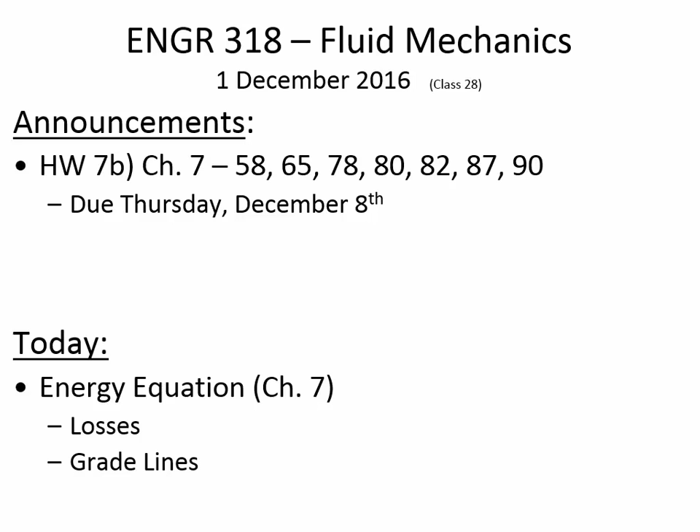The exam is going to be cumulative because it has to be. It would be impossible to give a non-cumulative exam in this class because all of the concepts build on each other. But a disproportionate share of the questions will come from the material since exam 2.

All right, well, let's begin by talking about pipe roughness. Here's a table you haven't seen before. It illustrates what's called the equivalent roughness of different materials — some materials that over time pipes have been made out of. Some of the more common pipe materials these days are galvanized iron, cast iron.

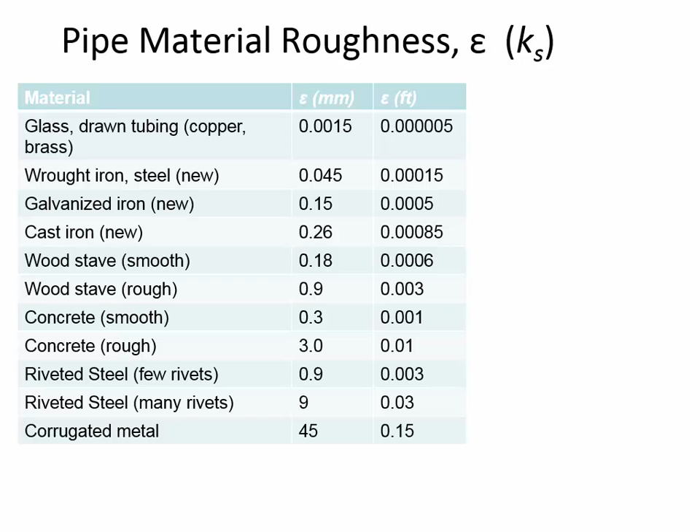Occasionally concrete pipe is used for gravity flow, meaning like sewers and storm sewers. It's pretty uncommon to have concrete piping for pressurized flow. It's kind of strange to think that long ago people used wood for piping, but they did.

I'll dim the lights so you can see the image there. That's a picture of some wood pipe that was held together with a coil of wire, and it's a little bit like a barrel. You need really excellent craftsmen to make a watertight pipe, and it's probably going to have lots of leaks. But what we're really focusing on here is the equivalent roughness.

You'll notice the measurements here are in millimeters or in feet, and what it measures is the average diameter if you were going to represent the roughness of the pipe as an equivalent piece of sand, which is a little bit abstract. But let's say, for instance, that we had smooth concrete.

Most people have felt smooth concrete — you have a visceral experience of running your fingers over it. So what we're saying is if we were going to represent the roughness of that surface by gluing pieces of sand on that surface, the equivalent diameter of those pieces of sand would need to be 0.3 millimeters. If you think about the size of a millimeter, I think you'll agree that makes sense, comparing the size of a millimeter to your finger going over it.

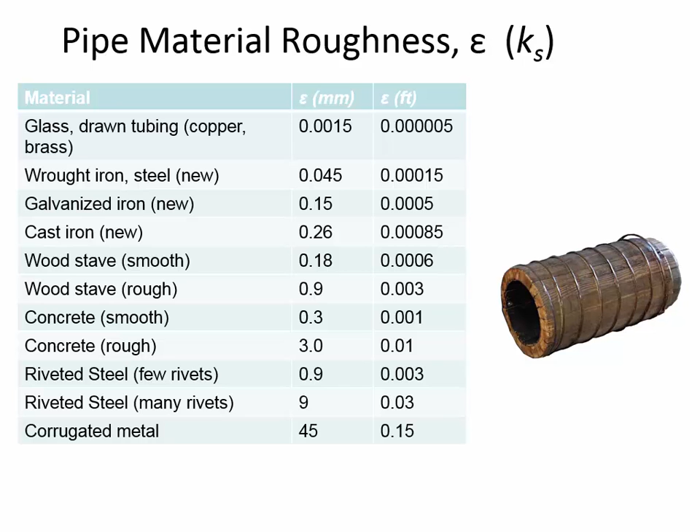You start off with an understanding of what the pipe is made out of. So if we had, for instance, a pipe made out of cast iron, then our K sub s for cast iron is 0.26 millimeters. And on this figure, we're going to say what's the diameter of the pipe we're working with. One common pipe diameter could be 0.250 meters, which is 250 millimeters.

All right, I think most of you have calculators. Can you tell me what would be the K sub s to D for this pipe material and this pipe diameter? Should be pretty close to 1,000 -- wait, 1 over 1,000, right? So is it 0.001 roughly?

Yeah? All right, so what you do is you start off here on the right axis with the relative roughness, and you find the curve that you're closest to. Or if you're in between values, like if you had 0.0008, then you'd be between these two lines, equidistant between them. So let's say in our case we're following this 0.001, and then on the bottom axis you can see it's saying Reynolds number.

Anyone? It's been a while, but do you remember what is the formula for Reynolds number? There's not a square root. I appreciate you taking a guess. Diameter is in there, yep.

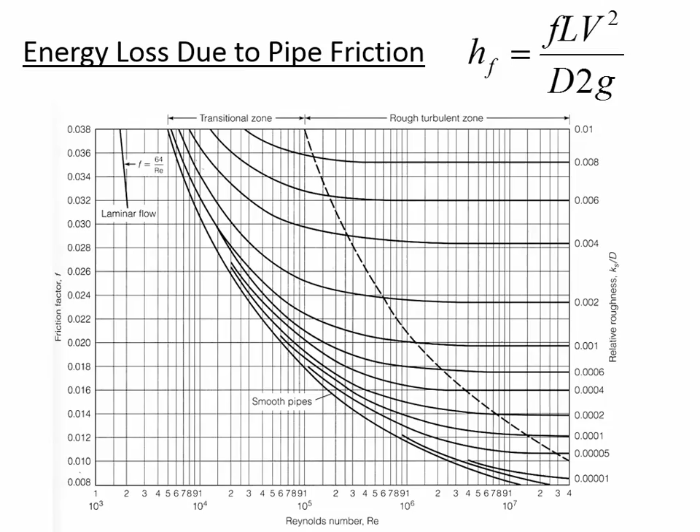Let's talk about local losses now. The Moody diagram applies to pipe friction, which is a distributed loss, meaning it acts over the entire length of the pipe. Sometimes we calculate how much energy loss there is per meter or per 100 meters of pipe. But the point is that it's spread out, occurring over the entire circumference of the pipe and the area of the circumference multiplied by the length. So it's a distributed loss.

These local losses are sometimes called minor losses, but that's kind of a put down—it's pejorative in a way, because they're important. In fact, if you've got a lot of fittings in a system, they can account for a considerable amount of head loss. So I try not to call them minor losses; I try to call them local losses.

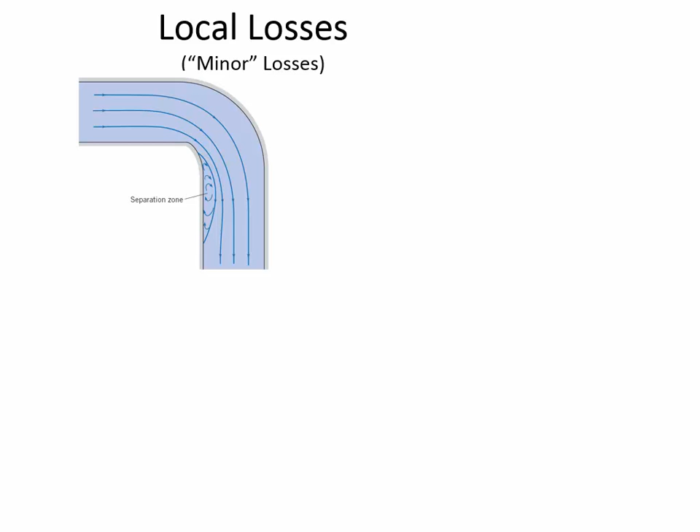They're caused when flow goes around an obstacle that induces turbulence. You can see here a separation zone where the streamlines try to reestablish an ordered pattern, and as they transition, there's a circulation, like an eddy, where the flow is hung up. The effective flow area is more narrow than it would be because this section of the pipe isn't carrying flow—it's just got this circular movement. So there's an energy loss from the circular movement, and the flow is also choked down through a smaller effective diameter, causing more energy loss.

So we can measure a local loss in the lab, and you will measure one next week. You've already done the distributed loss with the pressure gauge and taps a meter apart. Next week we're going to plug into a couple of different fittings and measure the delta P between the upstream and downstream tap of a fitting, then consider the velocity of flow through that fitting and the density of the water.

With that, you can calculate the K value, which is a linear expression of how much energy is lost at a certain spot—the higher the K value, the more energy you lose. When you have a flow path, say from a reservoir to your house, you count up all the locations where water flows through a valve, goes around a bend, or encounters a change in pipe diameter. Every one of those disturbances reduces pressure. So you add up all the K values, like an accounting exercise, and then multiply by the velocity head.

One word of caution: if you have lots of different pipe diameters, you're going to have a lot of different flow velocities. So you should only multiply the K values by the velocity that is applicable at the fitting in question.

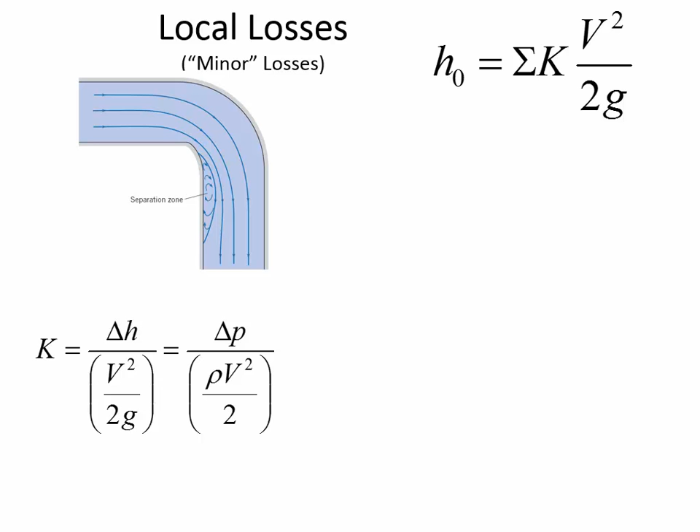If you brought your binoculars, you can see this table, and we've got different types of local losses. So here is a pipe expansion, and it's kind of interesting to note that they're even keeping track of the angle that defines how gradual the transition is.

Let's compare two different angles - the first is a 20-degree angle, the other is 180. 180 means an abrupt transition, meaning it's a small pipe immediately going to a large pipe, instead of what's pictured here, which would maybe be a 20-degree angle. So tell me, why does it make sense that the K value would be higher generally for the 180 degree instead of lower for the 20 degree?

Exactly. So anything we can do to make the transition more gradual and to help order the flow will reduce the amount of energy loss. 180 degrees is a very abrupt transition, so the K values are higher.

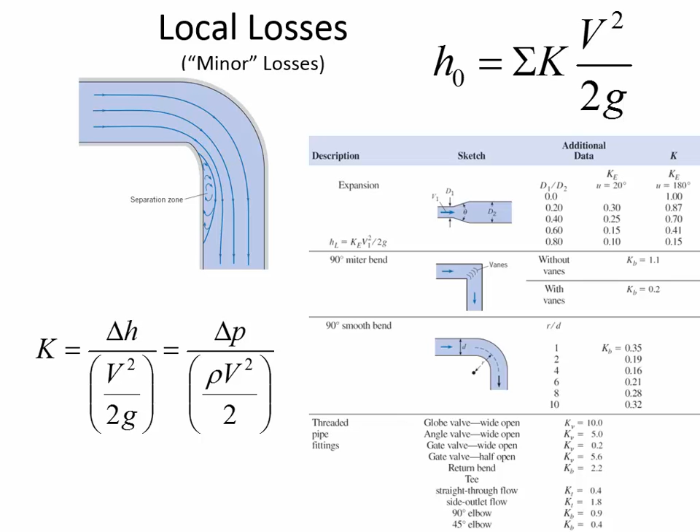All right, here is an expansion. One way to estimate the head loss in an expansion is just by the difference in velocities, so V1 minus V2, the difference in velocity squared, divided by 2g. We'll test that out in the lab as well, because in the pipe rack we've got a couple of pipes with a different diameter upstream and downstream, so we can see the effect of energy loss in the expansion.

If you have water going into a reservoir, then you lose all of the velocity head. This is an interesting thing we have to be aware of when we do energy grade line diagrams. Back to our drawing of a reservoir: think about the water moving through this pipe. Energy can be in 3 locations. Do you remember, I've said this before, where are the 3 locations that energy can be?

Not quite. I'm talking about something more abstract, not a physical location. When we write the energy equation, what are the three terms we usually start off with, before we talk about the turbine, the pump, or the head loss? What are the other three terms that were there when it was just Bernoulli's equation?

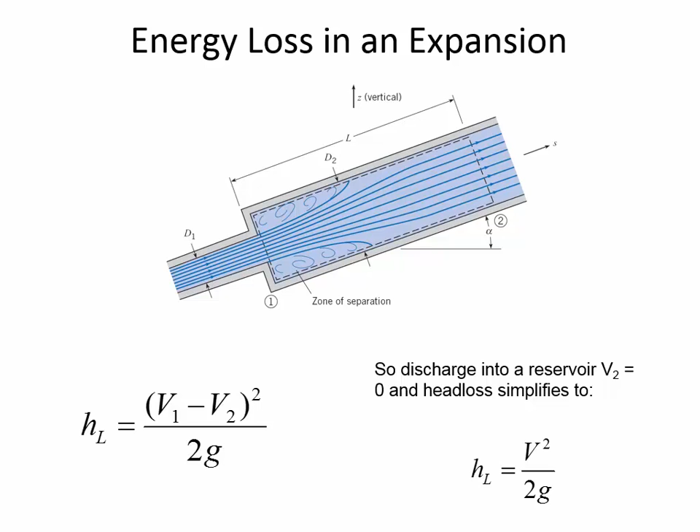You're going to have a question on the exam that uses grade lines. And I love these questions because they're so easy to grade. And, you know, that's important—my comfort and enjoyment is paramount when I'm writing the exams, right? No, not really. But these are easy to grade and they're actually easy to solve too, so I think you're going to like these problems as much as I do.

What this is, is a visual representation of where the energy is and how much energy there is. We're looking at a tank of water, with a pipe coming out of the tank, and at the end of the pipe there is a jet of water. The water is just flowing out with some continuing speed—it hasn't yet started to fall downward, but it does.

At the top of the tank is the energy grade line and the hydraulic grade line, at the water surface. EGL is the abbreviation for energy grade line, and it consists of the sum of three terms: pressure head, elevation head, and velocity head. By contrast, the hydraulic grade line, HGL, is only the pressure head and the elevation head. The velocity head is excluded from HGL.

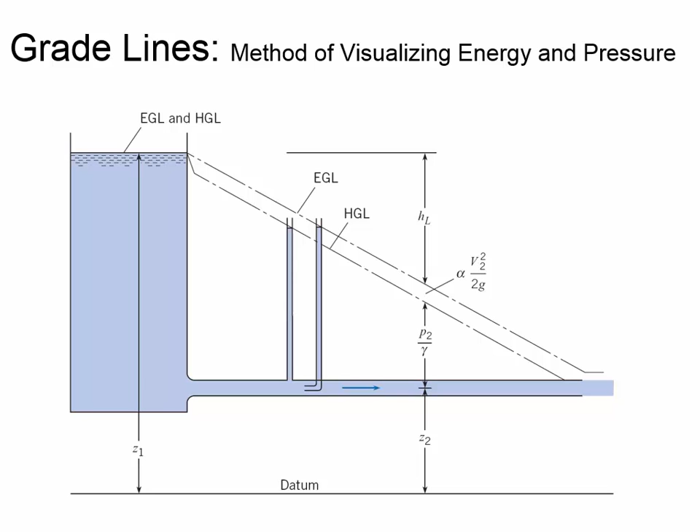Here's a pump. Look what a pump does to the EGL and the HGL. It's a straight vertical line, not a crooked line. It just instantly adds pressure - that's what a pump does. A pump does not add velocity, not directly. By adding additional pressure, that may speed up the flow of water compared to what was happening before the pump was operating. But it's not like when you've got a 4-inch pipe coming in and a 4-inch pipe going out - you can't have faster water in the outflow than you had in the inflow.

That would violate continuity, so the velocities have to be the same if the diameters are the same. So this pump isn't adding energy as velocity, and it looks like maybe the outflow pipe is a little bit higher in elevation.

Remember, the only three places energy can be are velocity, elevation, or pressure. So what this is actually doing is having an instantaneous increase in pressure from one side of the impeller to the other. And since the pressure head term is in both EGL and HGL, there's this vertical line.

And then the line is sloping downward again. And remind me, what does the slope of this line indicate? Friction losses. And the slope before the pump and after the pump is the same, because it's presumably the same pipe material and the same diameter, so these slopes are equal.

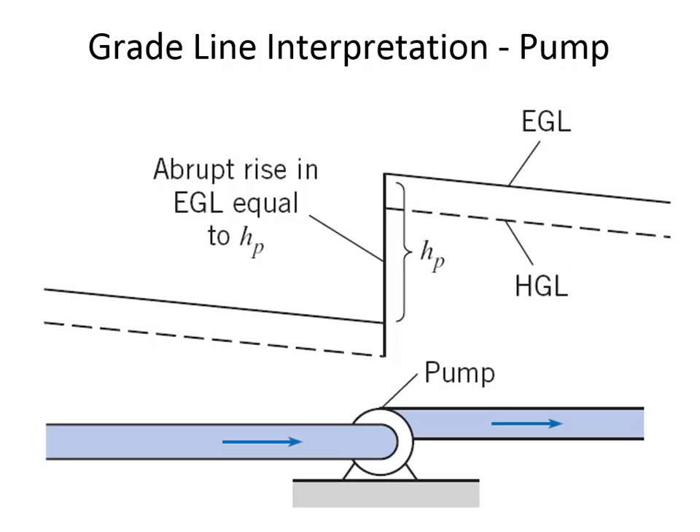EGL is always above HGL. So that's how you draw a pump, if you ever face a situation where you need to draw what happens to these with a pump. Maybe you'll face such a situation.

Here is a turbine, and in this turbine you can see it does the opposite of a pump. With a pump, the line was going up; now here the line is going down. Flow in this diagram is from the left towards the right, so head is given up to the turbine. That means there's a big reduction in the amount of energy that's available.

Now the EGL and the HGL are both at the tank surface to begin with. Then there's this point at which energy is being exchanged because the water is speeding up, so some of the energy has to go into the acceleration, and the EGL and HGL diverge during this entrance. That's what this little line is showing. It's sloped downward because there are friction losses, and you lose a lot instantly.

Now this is a bit odd. You'll notice that here the HGL is actually going up. Anyone want to speculate why there's an upward slope to that HGL? Elevation? No, it's not related to elevation.

Look at the pipe. What's happening to the velocity of the flow here? The velocity is decreasing because the diameter is getting bigger, so the velocity is slowing down. So if the velocity is getting lower, what is happening to the pressure? The pressure is going higher.

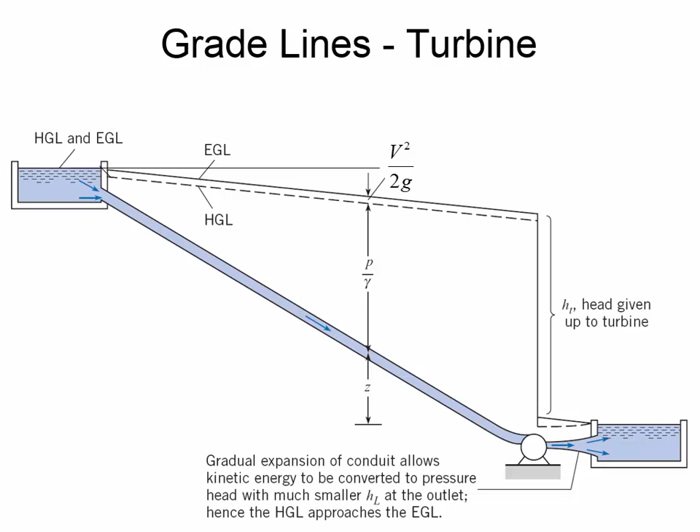Now, whoever made this figure, I think, was a little bit sloppy, because the EGL should be above the tank, and then there's an instant loss of energy, because we've already talked about how you lose the velocity head as soon as the water comes into a reservoir. So I guess maybe the diameter is so big by the time it gets to the reservoir that the energy loss is minor, but I do like to point that out.

Okay, a similar effect here. We have a nozzle, meaning that if the velocity is increasing, then there's going to be more energy loss. So see how the HGL is getting smaller because pressure is being exchanged for additional velocity in this section.

So you're losing HGL. One other thing to point out is that the slope of the EGL is getting steeper. You notice how it's relatively flat here, and then it gets a little bit steeper? So why is that? Why did the slope get a little bit steeper in that section?

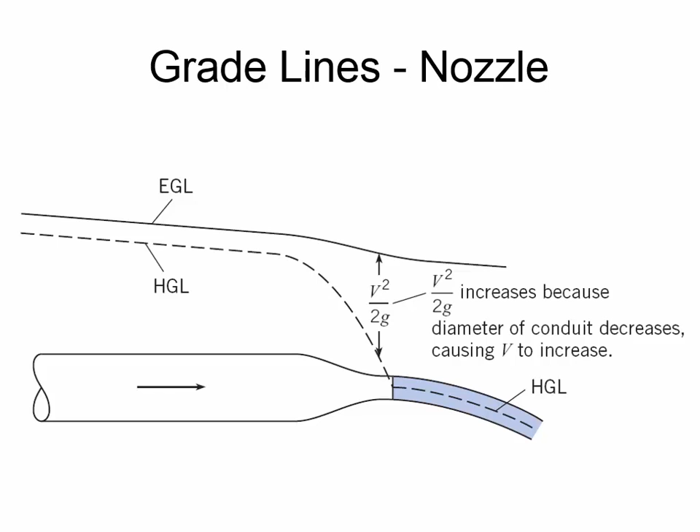Maybe it's partly local losses and partly friction, because it does happen at kind of an isolated location, but the frictional losses are going to become more extreme as well, because anytime you've got a higher velocity, the friction losses are greater. And I think that's illustrated on this next figure.

Look at the two different slopes of the EGL, back when the pipe was big diameter on the left compared to when the pipe is small diameter on the right. So for the small diameter pipe, the things you'd need to include in the drawing: you'd need the slope to be steeper for the small pipe, and you'd need the gap to be further apart.

Why is that? Why is the gap of these two lines further apart for the fast-moving flow? The velocity increases, right, and this gap is related to the velocity head. So that's an important characteristic.

Now we finally see someone who knew how to properly represent the head loss at the outlet. You've got this EGL that instantly was above the water surface, and then suddenly all that energy is gone. Here the little blue lines in the tank show the inflow diffusing into the tank, and all the energy that existed as velocity head is just lost. This is the EGL representation of that loss, as the line was above, now is below.

The other thing I want to point out is that the HGL should terminate at the water surface. Think about where the energy is in the HGL - it's talking about elevation head and pressure head. Inside the pipe compared to just outside, there isn't much change in elevation, and the pressure is going to be about the same, with maybe a little pressure change due to pipe friction over that minuscule distance. That's why you should always have the HGL terminate at the liquid surface, and the EGL should always be above it when it's coming into an open tank like that.

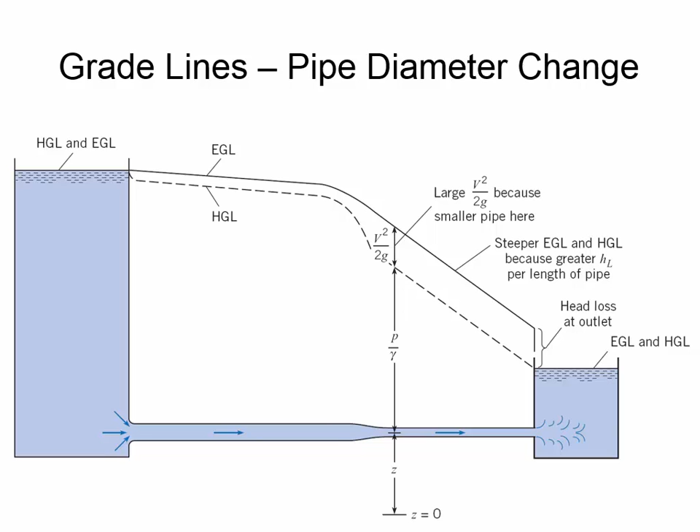Any questions? All right.

It's interesting to point out that the EGL and HGL are independent of the physical location of the pipe. It doesn't matter if the pipe is going side to side, up or down - the EGL and HGL just have this continual downward march related to energy loss due to pipe friction. The pressure in the pipe will be changing, but there can be an exchange between elevation and pressure that the EGL and HGL won't see, since that's occurring inside the pipe.

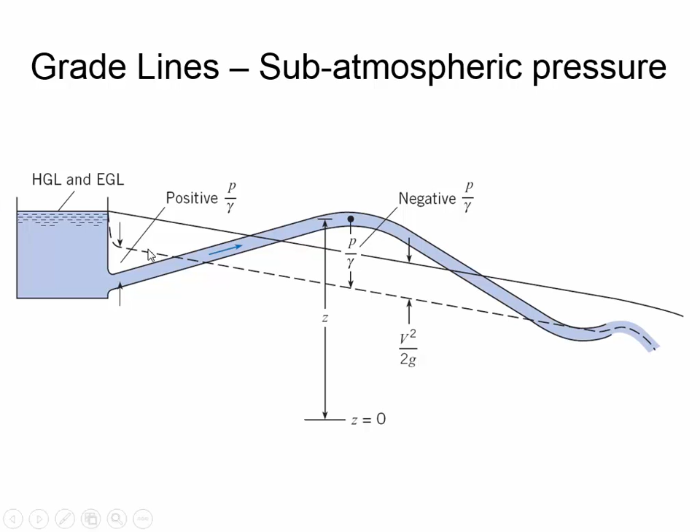So think about this high point in the pipe - you'll actually have negative gauge pressure there. Because if the physical location of the pipe is above the HGL, that means you've got a lot of elevation head, but not very much pressure head - in fact, the pressure head's negative. So if you cut a hole in the pipe here, it would actually start sucking air in rather than water squirting out, anywhere the pipe is above the HGL.

So again, here are the key things you need to include in the drawing: the EGL and HGL at the water surface, this transition where the EGL and HGL begin to diverge. The slope of the line depends on the pipe diameter, because the pipe diameter affects the velocity, and the velocity affects the rate of energy loss. Make sure you have the line above the water surface if there's a jet out like that.

All right, so I want to show you - go ahead. Is there any difference when you have a problem like this open to the atmosphere versus a closed space?

That's a great question. Let's say we had an enclosed tank on the left - yes, there would be a difference, because the water surface wouldn't indicate where the HGL is. If there was a cap on it and they pressurized it, the HGL would be above the water surface, and so would the EGL, since the EGL also includes the pressure head. Do we have to worry about that as well? I want you to worry as much as possible, so yes, worry about that. I won't give you any problems related to it, but I do want you to worry about it.

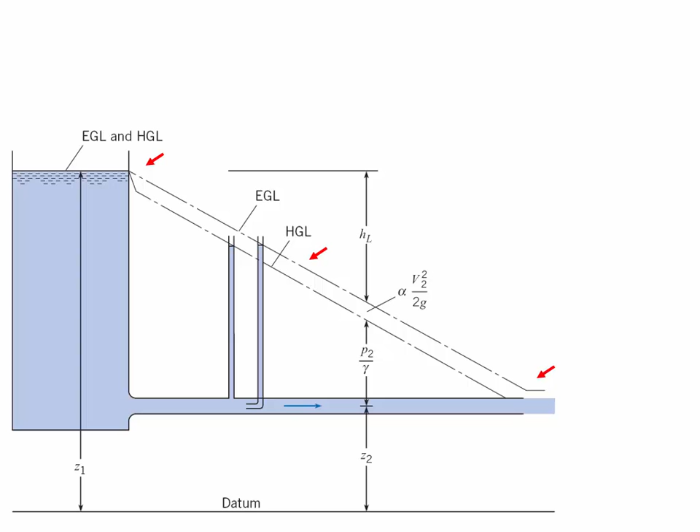Here's what I'd like you to do. I have a drawing here that shows a reservoir on the left and a reservoir on the right. I'd like you to try drawing the EGL and the HGL, so I hope you have some sort of a straight edge - a credit card will work fine if you don't have a ruler. There's also a problem on the back side that has a new element for you to try.

This is an iterative thing, so don't draw in ink unless you're really confident. I think most of you will have to erase and start over again because you're going to have different slopes, local losses, outlet at the tank, inlet losses, and so on. I want to give you a chance to try drawing these, and then we'll look at the solution in just a moment.

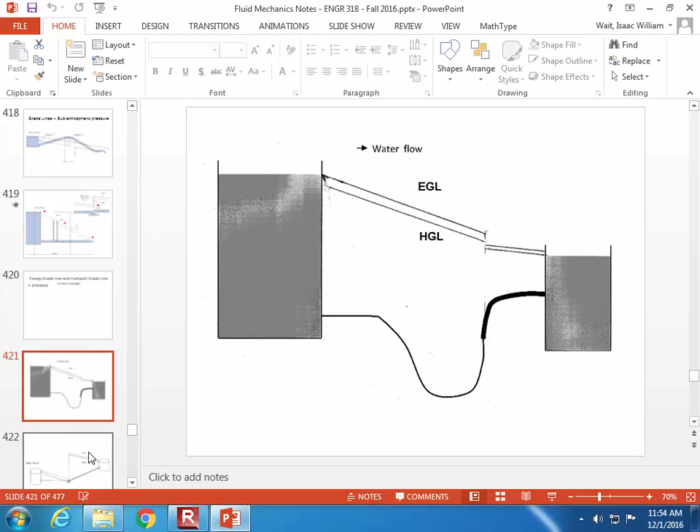All right, here's my take on it. These drawings are more qualitative than quantitative - not to scale necessarily, but relatively correct, meaning the velocity in the first pipe section is faster than the velocity in the second pipe section. That's why I've got the EGL and the HGL further apart in the first segment and closer together in the second segment. The slope of the line is also steeper in the first segment compared to the second.

Now what about this - is this just because I can't match them up? It's not a mistake, it's actually energy loss due to the transition, so both the EGL and the HGL decrease. Depending on what scale you drew them to, you could say you've lost velocity head here and more pressure head - the Bernoulli effect of exchanging velocity for pressure. So it's possible to draw the EGL decreasing but the HGL higher, but here I said the magnitude of the energy loss at the pipe diameter change is larger than any increase in HGL.

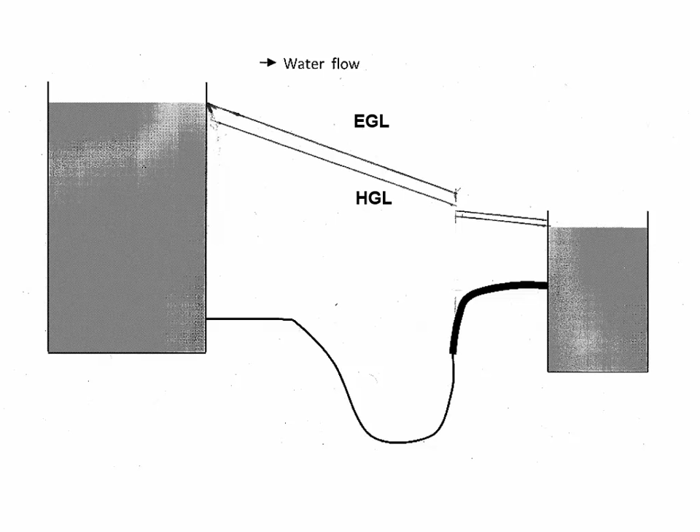There's also one on the back, and this one's even trickier because there's a triangle and a circle on top of the triangle. I'm not telling you what that represents because I want you to think about what it has to represent.

Don't forget to label the lines EGL on top of the HGL - one of these drawings is never complete unless you've labeled what the lines are. So we've got the EGL and the HGL starting at the tank on the left at the water surface. There's this induction point where they get further apart. Looks like I didn't draw very parallel though - I should have made that a little better. But it's steeper here on the left than on the right because this is the small pipe, that's the big pipe. Also, the distance is greater apart because you've got more velocity head on the left than you do on the right. Any questions?